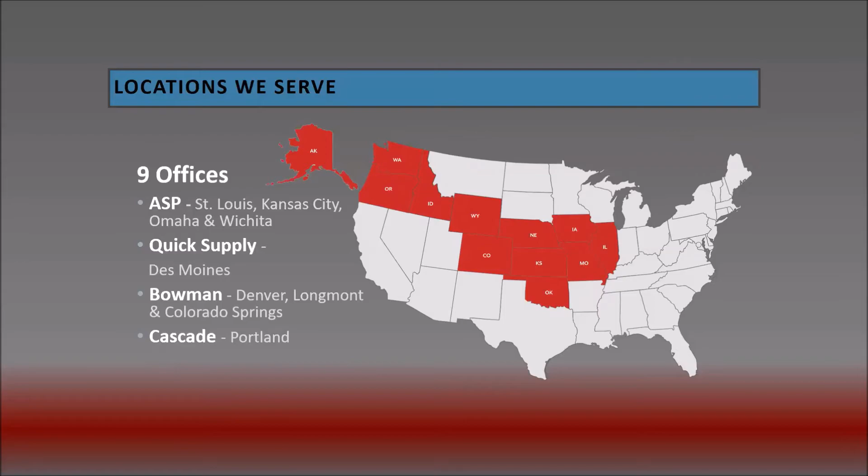We have a number of CPESCs on staff, and we cover a lot more states than even what's shown here on the map, but these are primarily our target markets. ASP covers Illinois, Missouri, Nebraska, Kansas, and Oklahoma. Quick Supply covers Iowa. Bowman Construction Supply has 3 locations in Colorado and also serves Wyoming. And then we have our new Cascade Geosynthetics office in Portland, Oregon, and they also do work in Idaho, Washington, and Alaska. We cover a whole lot of solutions with large warehouses and great trucking ability, and I'll get into that in a little bit.

These are just a few of our categories—we have many more. Erosion and sediment control, our rolled products, we're very well known for those, and our geosynthetics and geogrids. Stormwater management is where I spend most of my time. Green infrastructure and low impact development. We also have hardscapes displays at a number of our locations, and that continues to grow. All of those work hand in hand.

We also have waterproofing and bridge at Bowman Construction Supply, and an architectural division there as well. There's a whole lot of things that we can get into, but we don't have enough time to cover them in every individual webinar. Contact me or your local rep to learn more.

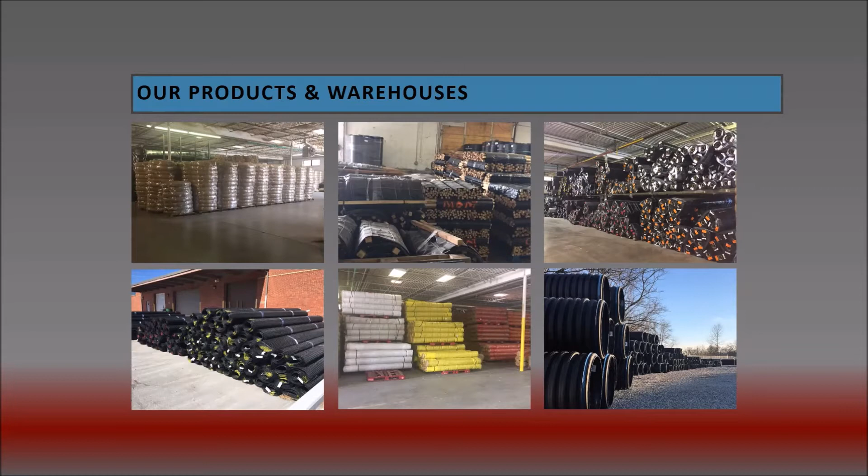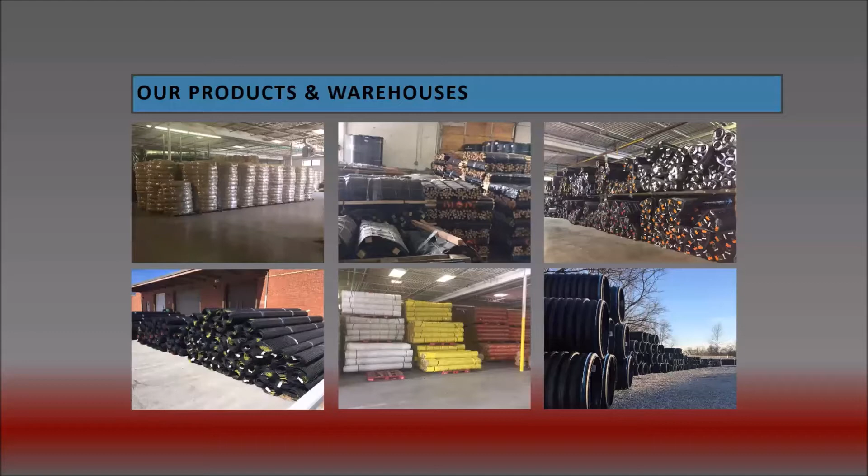One of the things I'm very proud of is how clean and organized we are on a regular basis, even in the very busy construction season. Our warehouse crews do a wonderful job taking care of the yards and the warehouse. We have a tremendous amount of inventory readily available, and we can put together some pretty creative shipments so that instead of you having to be responsible for logistics for a whole lot of different companies and different trucks, we handle that for you.

So with that, I'm going to hand over the remote controls to our friend and guest speaker here today, my friend Sam Justice. She's a PE, a fellow civil engineer. Sam's responsible for overseeing project evaluations, managing the engineering activities of Geosystems worldwide partners, and coordinating research and development. She has experience specializing in water resources, stormwater management, and rock and soil stabilization.

You can go ahead and click to the next slide if you want, Sam. She's going to cover repair and reduce slope erosion with Presto Geosystems. She has a geotechnical engineering degree from University of Michigan, and a geological engineering graduate degree from Michigan Technological University. She's a registered professional engineer. Sam provides technical and project-specific support to consultants, contractors, and distributors for all of the Geosystems products and application areas.

I've had the pleasure of traveling with Sam and doing some live presentations at some engineering offices, and we've had her as a guest speaker here with us before. She does an excellent job. Sam and I just talked this morning about how a lot of our engineering can still be done virtually. In the old days, everyone thought we had to go see every project site to walk it and talk it, and we love doing that. But we can be a lot more efficient and productive with our time if we just embrace these virtual meetings. And if that leads to an on-site visit someday, so be it. But we can do a whole lot of good engineering up front.

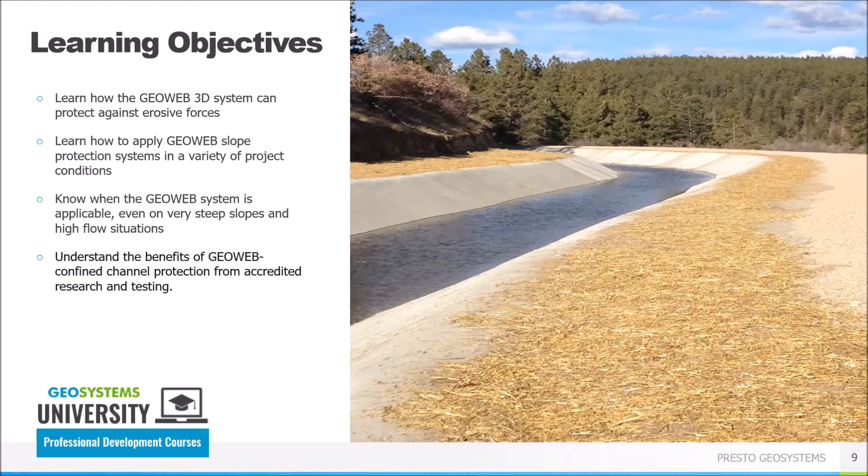And then we're also going to look at some of the university accredited research that we've performed with the Geoweb system, so that you know that we're not just pulling numbers out of thin air. We actually do back up what we are interested in and what we're trying to talk about here.

So we're going to start out with what the description is of the Geoweb 3D soil confinement system. If you're not familiar with this type of product, we've been doing it for about 40 years. So it is out there. It is not brand new, but it's still new to some people.

So the Geoweb system is our version of GeoCell technology, and it consists of two main attributes. The first is going to be the cell or the container size. The cells come in 3 diameters, small, medium, and large openings, and then cell heights from 3 to 12 inches. So what dimensions you're going to choose are going to depend on your project details and whether you have loading requirements, what your flow situation might be, that sort of thing.

We can help you determine which one is going to be the most appropriate for your project and your specific job. There are also 5 section lengths, so how big your panel is, to best fit your project site specifically.

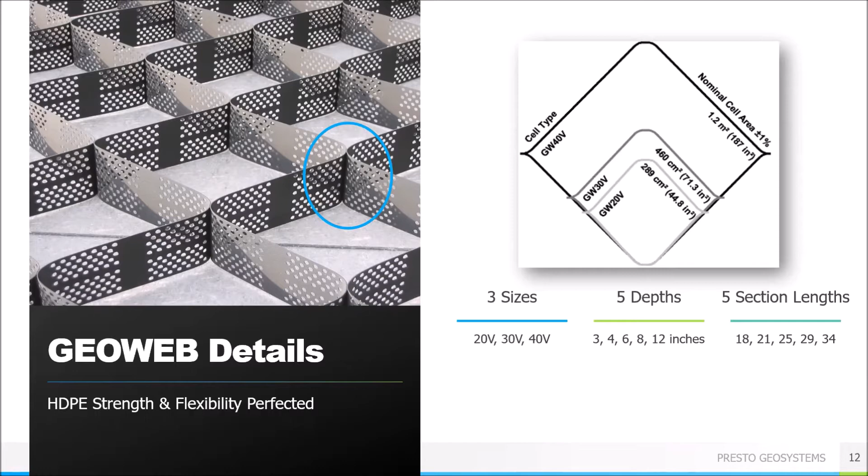Definitely want to avoid that. So our cells don't use any sort of exotic fillers or polymers, which reduce that weld strength. Some other geocells on the market do. I'm not going to name any names, but there are some lower quality products out there that I just want you to try and avoid, because I don't want your projects to fail because of something internal with the geocell. So just keep that in mind.

So the second main property of how a geocell works is going to be the infill material of the cell. There are 3 main infill types that can be used with the Geoweb system, depending on the type of protection that you're looking for. That's going to be topsoil with vegetation, aggregates and granular soils, and then concrete.

In most cases, this does allow you to use on-site salvaged or site won materials. So if you're doing excavating, you can reuse that material. So you don't necessarily need to import fill if what you have on site is going to work.

So all 3 types can be used for slope and channel protection. When they're used in channels, concrete is going to be your best option if you do have very high flows that are anticipated. Otherwise, aesthetics is kind of going to be the driving factor in which material you choose, whether you want to see grass, whether you want to see stone, that sort of thing.

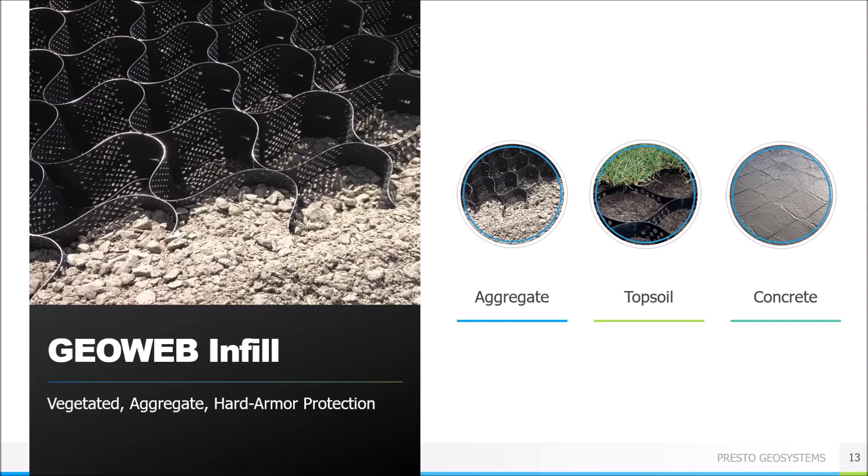We have two different options for anchoring. The first is using either stakes or face anchors, placed along the slope face and at the crest. The number of stakes needed is project dependent. The other option is to use tendons and some sort of crest anchorage system, usually a dead man pipe, perhaps concrete anchors, earth or rock anchors, whatever may be best for your site.

Then you have the Geoweb material, Geoweb panels filled with your infill material. And if you're doing vegetation, we recommend something like a biodegradable erosion control blanket until that vegetation becomes established.

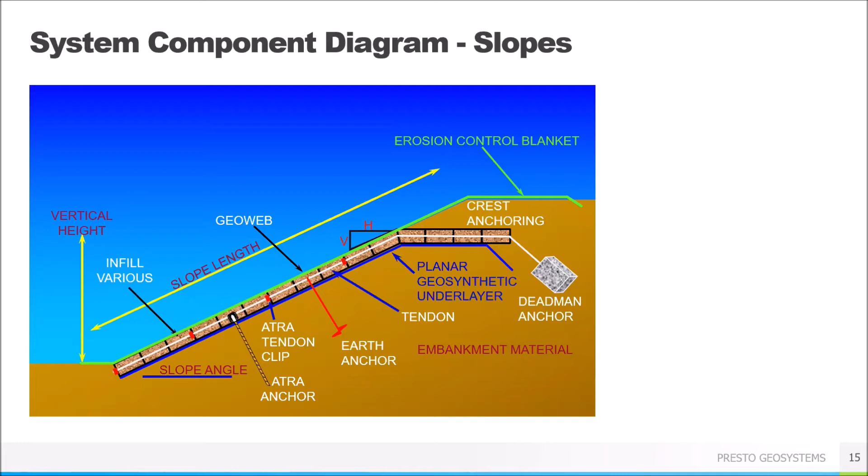It's basically the same concept where you put that geosynthetic liner, geotextile, something like that down over your native subgrade. Then the Geoweb panels, fill them with your material, and then you have some sort of anchorage—anchors along the slope face, tendons, and some sort of crest anchorage.

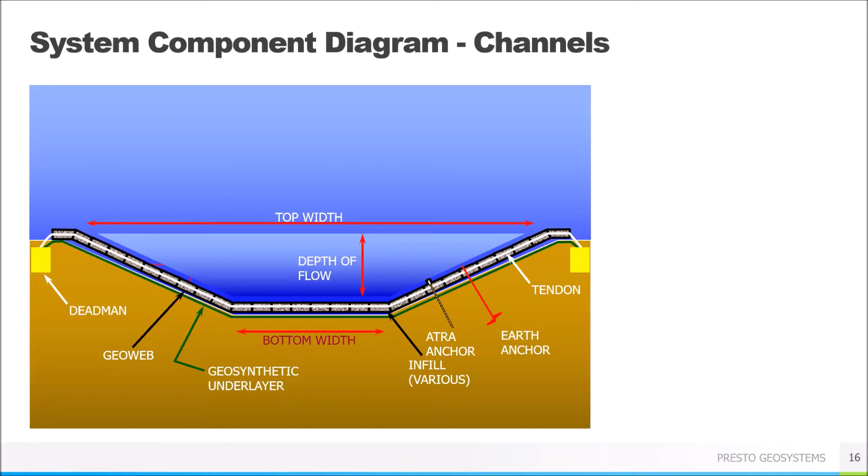So there are different options available. We are always happy to help you figure out which one is going to be most appropriate for your project. Definitely feel free to reach out to us and we can help you determine what's going to be the best option.

Most channel projects are going to be very similar to a slope project, so feel free to think of them interchangeably. I'll say slope and channel, but they basically are the same concept. There are two ways of building up the Geoweb protection system.

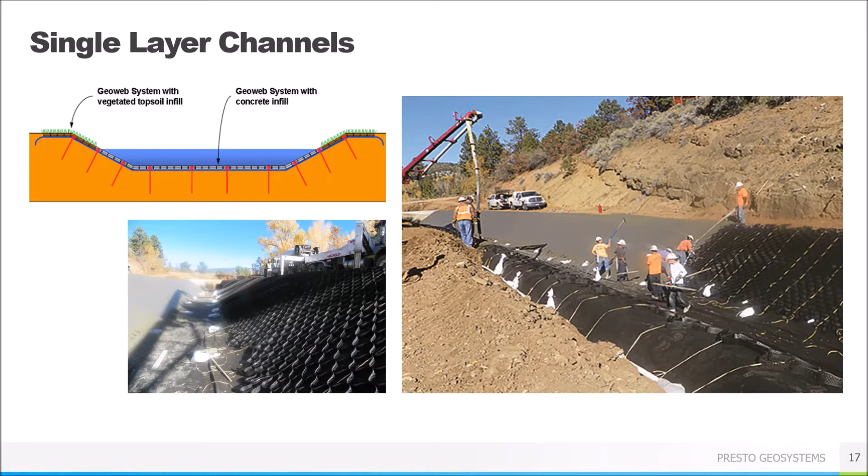The first is to use a single layer system where the Geoweb panels are laid directly on the channel bottom and side slopes and then filled in with their material, like we just saw in the diagram. This is good for areas where the slopes are less than 45 degrees—relatively shallow. So as long as there's room for the footprint of your channel or slope, this is probably the most efficient way to protect against erosion.

However, if space is limited, or if the project area is going up against existing structures like homes or roadways, a multi-layer system can be designed. In this case, the side slopes need to be pretty near vertical, and the Geoweb panels can be stacked on top of one another to create a retaining wall structure. That can happen on one or both sides of the channel.

Geoweb retaining walls can withstand the same types of velocities and shear stresses as the single layer system, and they're still flexible enough to handle curves, changes in grade, anything like that. It's a great way to create a deep channel or have really steep side slopes up to 80 degrees. There's a lot of options for mixing and matching how the panels are placed, allowing for a single design solution even with really complex project sites.

Getting into retaining walls is a whole other webinar, so we don't have too much time to talk about it today, but if you do have questions, I'm always happy to answer. We have more information on our website at prestogeo.com.

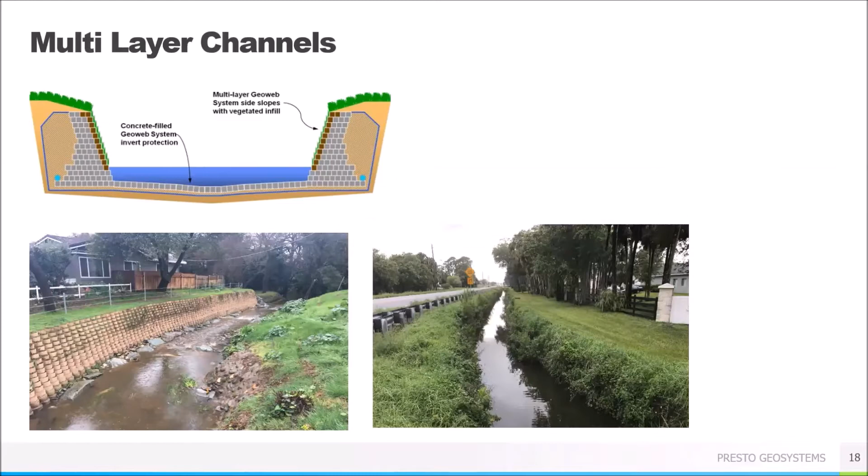Okay, so if we think back to the diagrams, there was one thing that wasn't shown, and that's the connection device between the individual Geoweb panels. So the ATRA key is what we call it, and it's the first component for a completely integrated system, connecting individual panels of Geoweb into a single web that covers your entire project area. It allows for faster installation of Geoweb and is going to last the lifetime of the project.

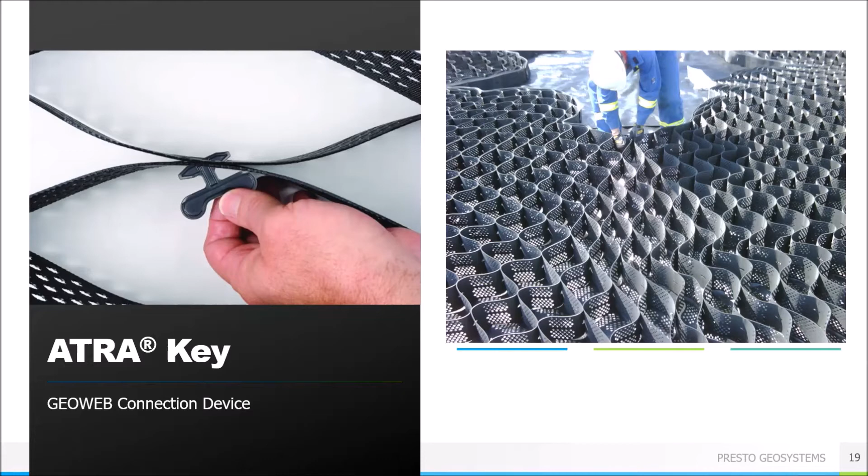Ensuring that the slope is protected and that the Geoweb system isn't going to fail under your anticipated loads. The specific engineering values of the ATRA key are going to ensure that the system holds up to loading over time without corrosion that you often see with metal staples or failure from underperforming cable tie systems.

And so now we can look at some of the anchorage options that we talked about. If the Geoweb panels are laid basically completely flat, anchorage is usually not needed because gravity is going to do all the work. However, as your slope angle increases and you start running into gravity hurting you rather than helping you, you are going to need some sort of anchorage system.

For shallow slopes, so think 2 horizontal to 1 vertical, about 26 degrees, stake anchorage is usually going to be sufficient. So we have 2 options for stakes. One is made of standard steel rebar, and then one is made of high density polyethylene, HDPE, which is shown in the photo here.

So if you're in a saline environment, like along a coastline, the HDPE stake is actually going to be a lifesaver compared to corrosion-prone steel. And the stakes can be driven either by hand with just a hammer, or with a power drill if you're looking for easier installation.

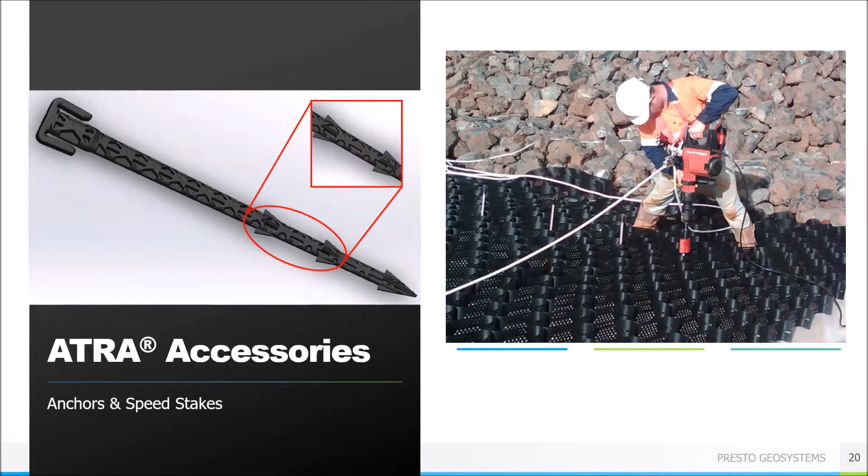Then we can get into steeper slopes, greater than that 2 to 1, but also in areas where your native soil may be highly erodible, or if you're over a surface that can't be punctured. So if you have a geomembrane liner, we can do a tendon anchorage system.

One more thing to say, the Atra tendon clip is proprietary to us. No one else has this type of load transfer device for their system. So they're using things that aren't as strong, things that aren't designed specifically to work with geocells, to try and hold the tendons in place. So it's, one, a lot harder to install, but two, it's not as great in terms of long-term performance.

So at Presto Geosystems, we've done a lot of work and research to create this whole system solution where we know the product and all of the accessories are going to be the right thing for the project that we recommend them for. So we do stand behind our work, and we really want to give you the best options that are available.

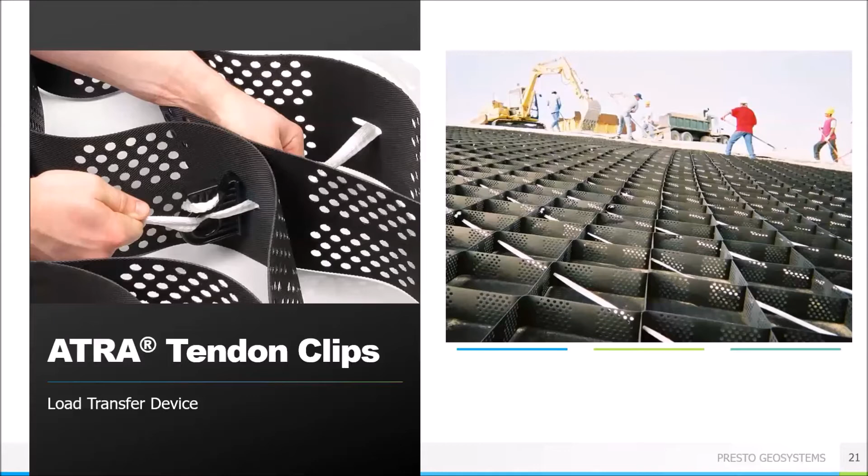Okay, so basically with that overview of the Geoweb system, let's dig a little deeper into some of the capabilities and functions of each of the infill types that we had talked about. And we can start with the vegetated infill, so using topsoil and then having a grass surface.

So one of the best things about the Geoweb system is how much trust we have in how the system works. That's because we have 40 years of experience and research backing up what we are saying. So a huge series of tests were completed through Colorado State University in Fort Collins under the direction of Dr. Chris Thornton.

CSU is considered one of the top hydraulic research facilities in the world, and it's pretty unique since it's located underneath the Horsetooth Reservoir and has a couple hundred feet of static head and can achieve extremely high velocities and shear stresses in their flumes. So this is probably the best place to test for any sort of hydraulic testing. It's amazing.

I know you didn't ask me to chime in, but I want to for two things. One, I love the Atra key, the Atra tendon, and the tendon clips. We've done a lot of projects, some with, some without, and all the ones we did without, I feel like we regretted it. We love those products, not because that's something to sell, but because they really, really work exactly as designed. But I'm also close personal friends with Dr.

Chris Thornton, and I've been out to CSU, and they do amazing work out there. I love it. So I'm excited about these.

Thanks, Sam. Vegetated infill testing was performed with two different objectives in mind. The first was the ability to withstand high velocities and shear stresses, which are the main components you think about when withstanding water flow. The second objective was to compare the performance of the topsoil-filled Geoweb system versus riprap and other conventional solutions such as erosion control blankets and turf reinforcement mats.

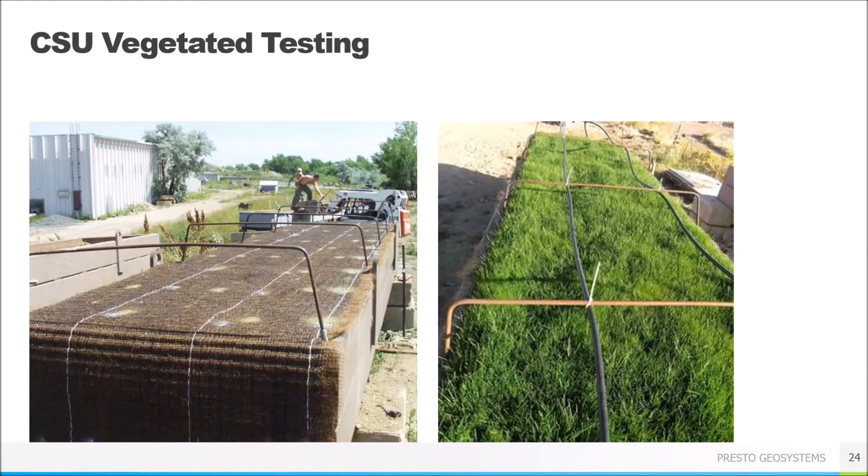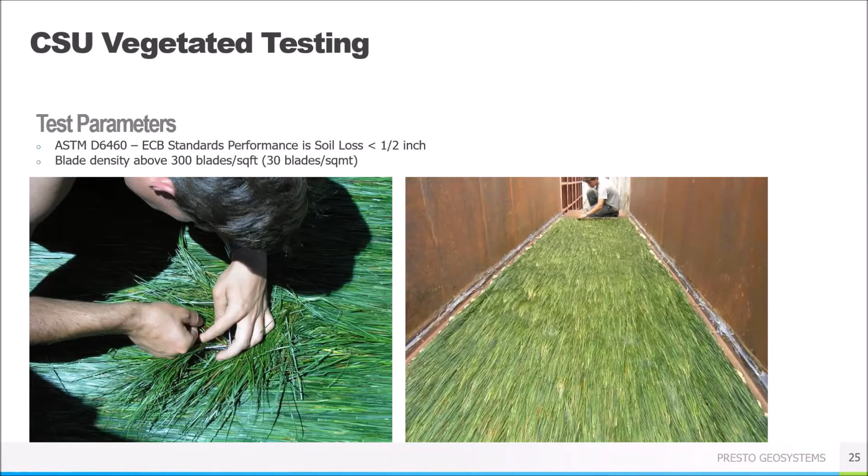A total of 10 one-hour-long tests were performed with varying conditions, including flow rate and bed slope angle, done in accordance with ASTM standards. That covers both soil loss through scour and blade density. The ASTM standard considers a successful test when you have less than half an inch of topsoil loss and at least 300 blades of grass per square foot. The blade density is important since it doesn't help if all of your soil stays in place but your grass washes away—you're just left with a muddy, ugly looking channel. So we're trying to avoid that.

Vegetated channels hold up really well, even against turbulent flow, such as around corners or near rough terrain. Most people would think a vegetated channel can't actually handle that much water, but when it's properly confined within the Geoweb system, along with a surface protection system, we can achieve velocities of 30 feet per second and shear stresses of 16 pounds per square foot.

Here's one of those tests, being performed in the outdoor flume. You can't even see the vegetation under all the water they've run through here—about 6 to 8 inches of water over top of the filled Geoweb system in that photo. So actually very turbulent for being in just a standard square flume.

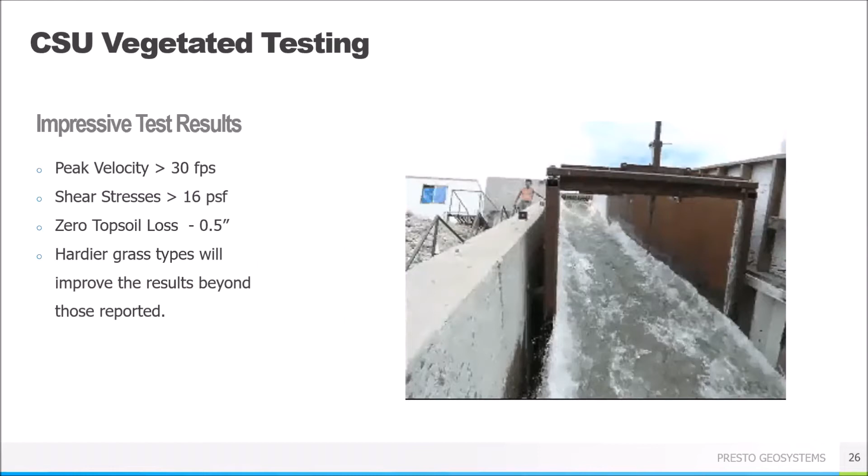Here's a quick comparison of some pretty impressive results, if I say so myself. The Geoweb filled with topsoil can handle velocities of a little over 29 feet per second compared to the 12-inch riprap, which is only about 14 feet per second. It even outperforms the use of a turf reinforcement mat by itself, basically doubling the acceptable velocity and shear stress.

So the key takeaway is that the topsoil-filled Geoweb system provides about twice the protection as 12-inch riprap and doubles the performance from a standard TRM or ECB. Really great results.

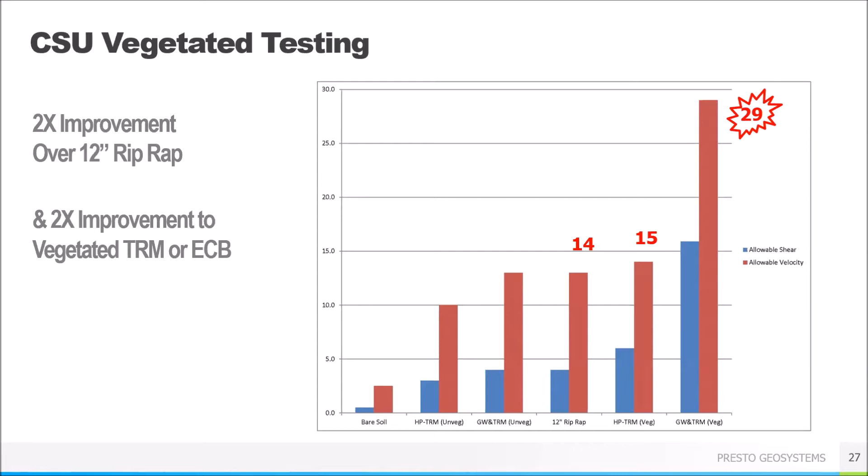Here's a typical application using the Geoweb product along the side of a highway compared to a conventional riprap system. The riprap system looks unfinished and is going to need a lot of maintenance after every storm event to ensure there hasn't been significant loss of material. With the Geoweb system, you get a nice green lawn and can be assured it's still going to look this good even after a big storm event. Much less maintenance and much less worry.

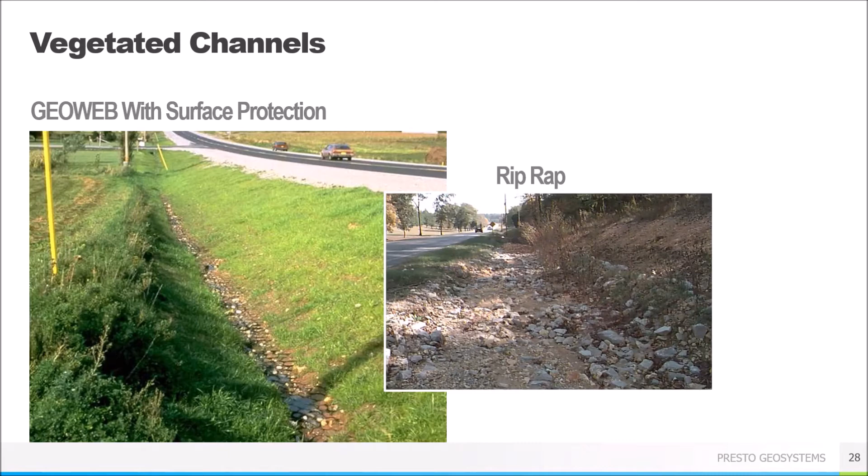An access road is actually going to be built above the slope where that excavator is currently sitting. So the slope had to be stable enough to support the expected road traffic as well as hold the soil in place. And when used as a road embankment, the Geoweb system protects the slope from water runoff and sloughing with no loss of vegetation.

Here we can see some space constraints at the toe of a slope in the form of another access road, so the slope couldn't really be regraded to a gentler, less erosive angle—it had to stay at this pretty steep one. A nice feature of the Geoweb system is shown in our after photo on the right, where there's a guardrail installed at the crest and a fence installed at the toe. There's not really a limit on this sort of infrastructure being installed near or even on the Geoweb panels, which is great in tight spaces like this one.

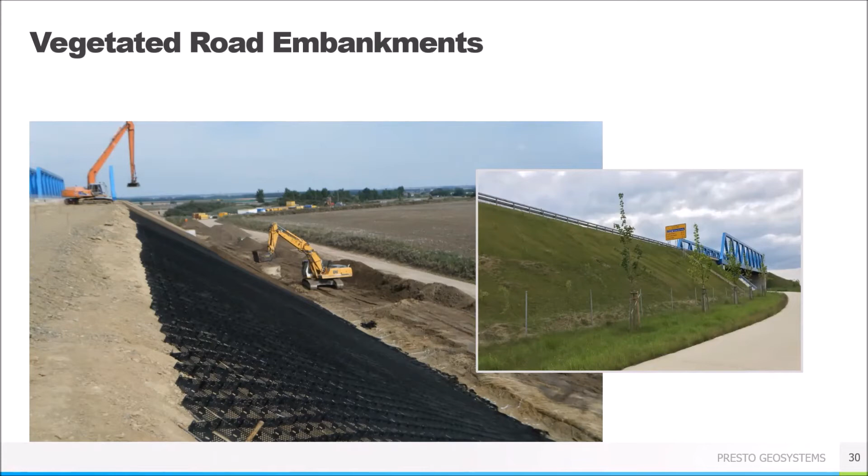So this was a slope alongside a roadway that shows a common problem that can be solved with the Geoweb system. Erosion and washout of soil slopes onto road surfaces is a problem almost everywhere. Covering the slope with the Geoweb system and then filling in with topsoil allows for a clean vegetated slope without that concern of having to constantly go back and replace the soil after rain events.

We typically recommend some sort of surface protection, such as hydroseeding, be used over the Geoweb panels until that vegetation has a chance to grow. So just give that grass a little bit of time.

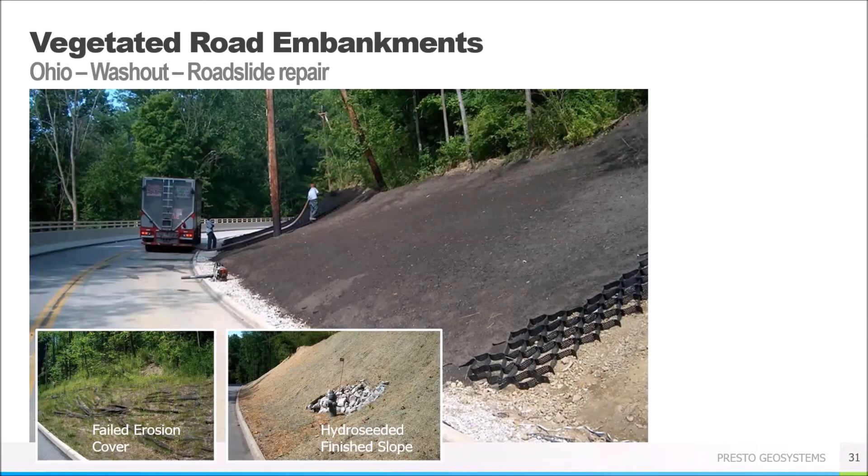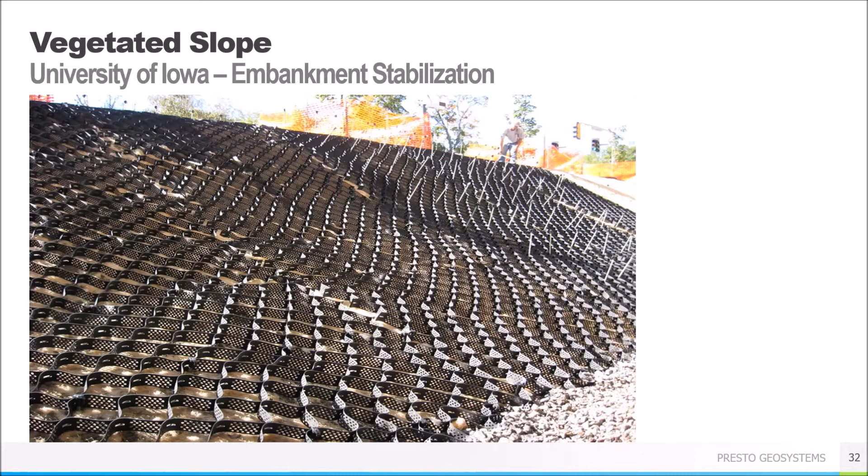Immediately behind the cameraman is a building for the University of Iowa, and it's a really common project that we see, just needing some basic surface protection on an existing slope within the constraints of a project site. The Geoweb system is fast, easy, and really effective at this job.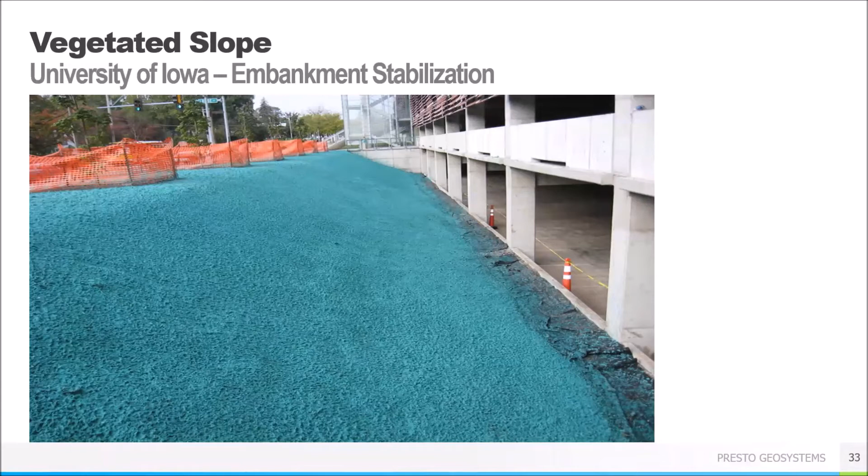Throw some Flexterra growth medium over the filled Geoweb panels, and soon you have a nice green slope that won't allow significant runoff or soil to flow into the parking garage. When the grass is fully grown in, you can't see the Geoweb panels at all. It just looks like a natural slope that people can walk on if needed, because somebody's cutting through there to get to their car a little bit faster.

So roadway embankments are not the only option for the Geoweb system. You can place the panels along a shoreline to help against erosion due to water movement or wave action. This project was on a man-made lake in Kansas.

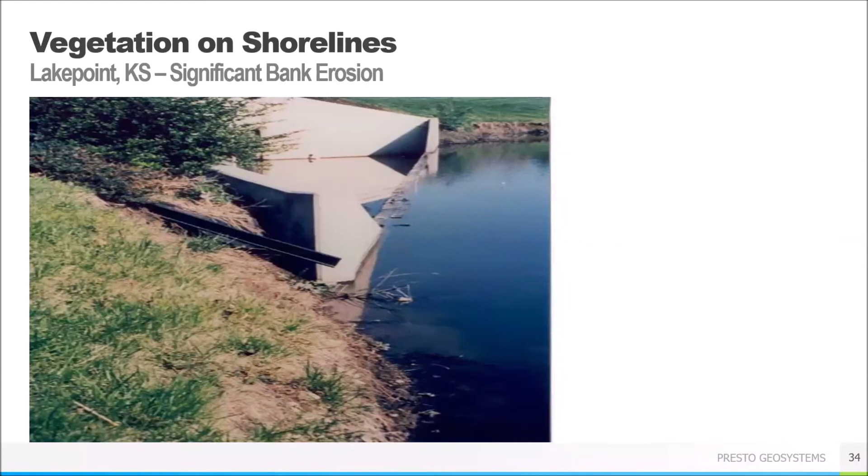Water is constantly flowing, gently, but moving nonetheless towards an outfall structure. And the shoreline was getting pretty severely eroded, eating into people's backyards and making it unsafe to walk on. So the Geoweb panels are placed both above and below the average water line in this type of project.

The panels need to go below that water line to ensure that they don't get lifted up due to wave action, and essentially to protect that entire shoreline all the way to your stable lake bed. The area does not have to be dewatered to do this type of installation, so you don't have to worry about putting in any sort of temporary cofferdam or anything.

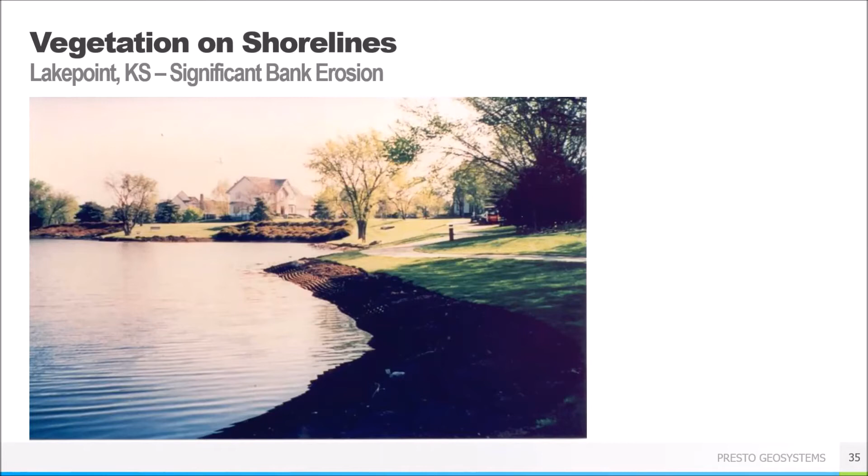The Geoweb panels will float initially, but eventually they're going to be staked down to be held in place. Once the infill material is there, the system is not going to move. In this photo, it's pretty obvious to see where the Geoweb panels are, but over time, the divide between new and old grass becomes a lot less noticeable.

Using a soil and a grass type that's local in your area, maybe even using that salvaged material from the excavation process, will help with blending in so you don't have such a stark dividing line. But now you can walk along the lakeshore without fear of it sinking in, and the shoreline is going to be protected against erosion for years to come.

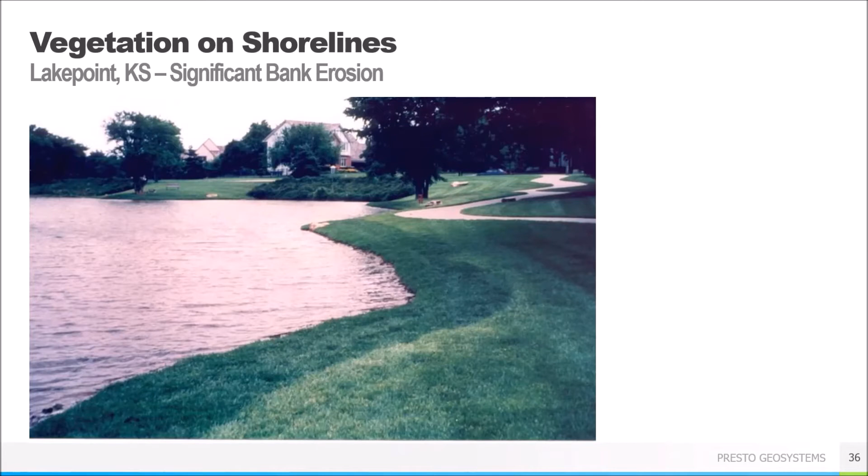One last thing for vegetated infill - I just want to highlight that the Geoweb system along channel side slopes is definitely an option. Notice how the panels just cover the sides, not the channel bottom itself. So the Geoweb panels will allow for vegetation growth up both the embankments, which normally aren't going to be underwater, so grass is going to grow just fine.

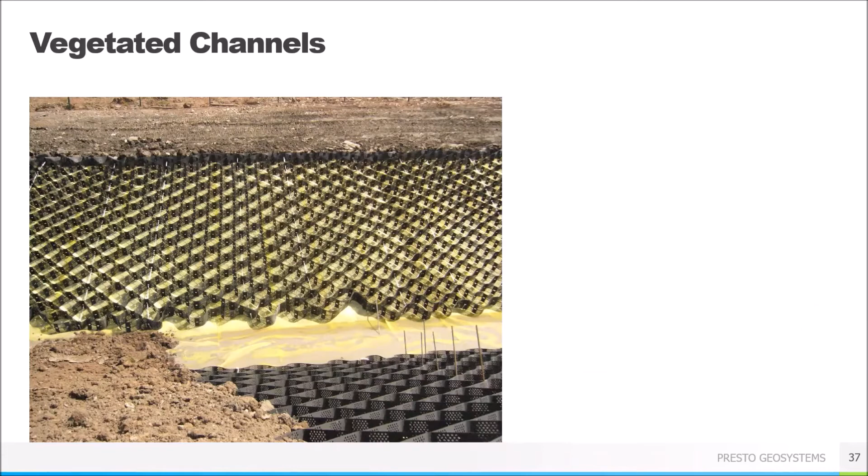Notice that there is the bright yellow liner that's there below the panels. So they decided to use the tendon anchorage system, without causing any damage to the liner. Even with that liner underneath, the vegetation can still grow because of the soil held within the cells of the Geoweb panels. So now this stormwater overflow channel, if it does become flooded, the side slopes are protected and the channel can do its job.

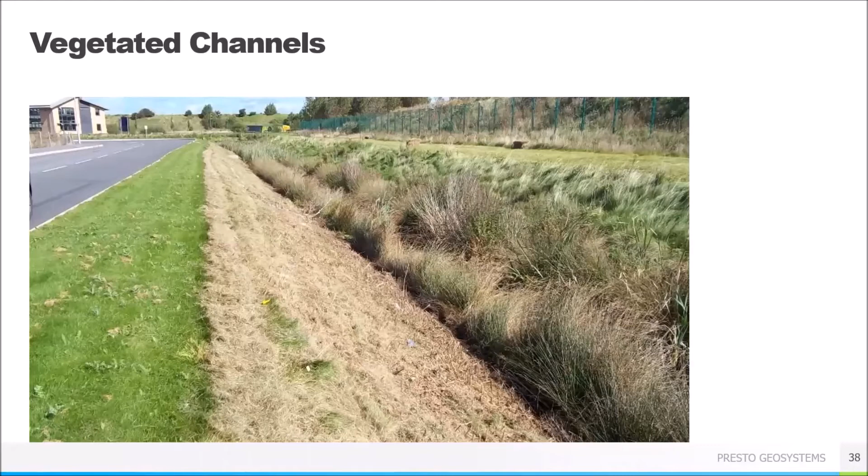Maintenance on these type of systems is actually really easy. Lawn mowing can happen if you have regular grass - just use your standard lawn mower, walk-behind and riding varieties, totally fine. You're not going to damage the Geoweb panels by doing that. Or you can pick a flowering or tall grass vegetation and no maintenance is needed to begin with. So it really is what we call a place it and forget it type of system.

Okay, so that was a lot on vegetated infill. Hope you were able to keep up. But let's move on to aggregate or stone infill next.

The crushed aggregate testing at CSU was both indoor and outdoor. The main objective was to determine how much the Geoweb 3D confinement can aid in reducing the riprap stone size. The indoor testing consisted of varying flow rates and bed slopes, along with 2 different aggregate stone sizes. We looked to see how well the aggregate stayed in place to determine what rock size would prevent washout. We ended up maxing out the indoor flume and had to go to the outdoor flume to allow for increased flow rates.

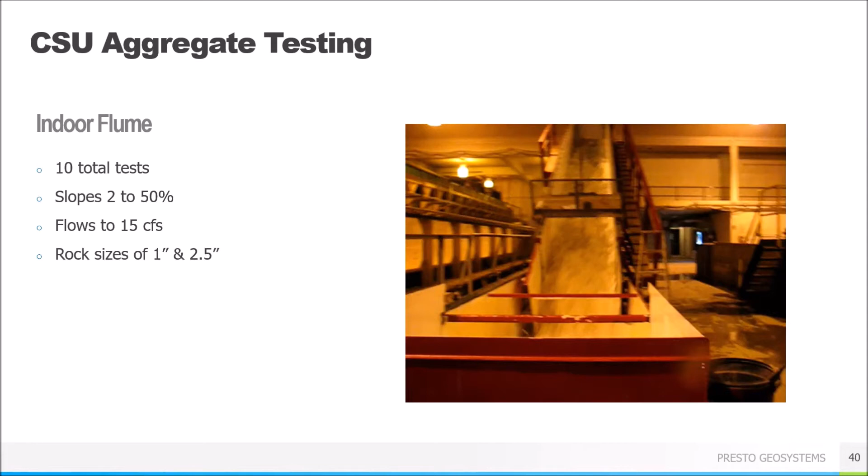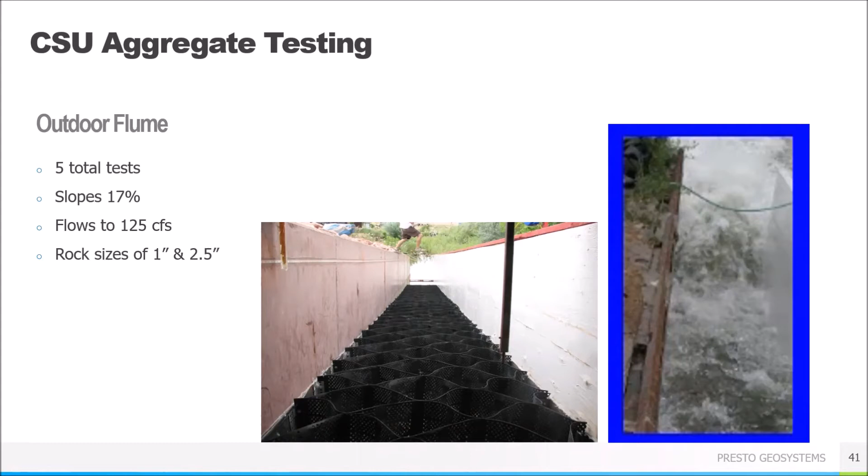We got flow rates up to 125 cubic feet per second, along with 2 different aggregate sizes. You can see it's pretty turbulent flow going through here, and again we're looking to see how that aggregate stays in place. Obviously, the system doesn't work if the water can just pick up the stones and move them somewhere else. You want them to be held by the Geoweb panels.

The results are pretty impressive, working on a steep slope and allowing some pretty high velocities and shear stresses. Although if we remember back to the vegetated system, the allowable velocities there were 30 feet per second, and now we're down to 18, so it's actually a little bit less. A vegetated system can withstand those higher flows and stresses, which may seem counterintuitive until you think about the strength of a properly rooted grass system compared to a single stone within the aggregate. So it makes a little more sense.

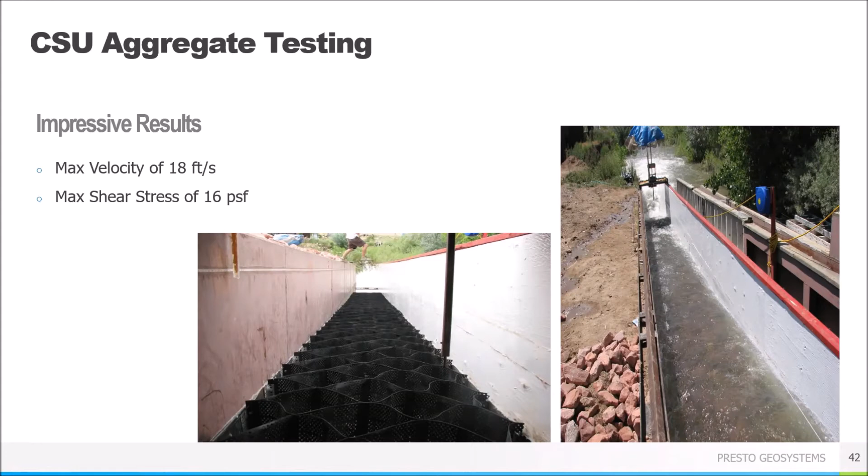Remember, the main objective was to determine the reduction in riprap stone size due to the Geoweb system. Also keep in mind, vegetated channels can only withstand water flow on an intermittent basis, otherwise the grass is just going to die because it's drowned. If you have continuous flow, aggregate infill might be the better option, even though it can handle a slightly lower velocity. So different things to think about.

So Dr. Thornton put together a design tool that we use. It's based on an entirely too complicated regression analysis, but it helps us compare the reduction in crushed aggregate with the Geoweb system compared to conventional riprap. The tool is based on all of the testing data, and it allows us to predict the rock loss and rock size based on specific hydraulic conditions. So what it comes down to is that we can recommend the appropriate cell depth and rock size for individual projects so that you can be confident that the aggregate placed isn't going to wash away.

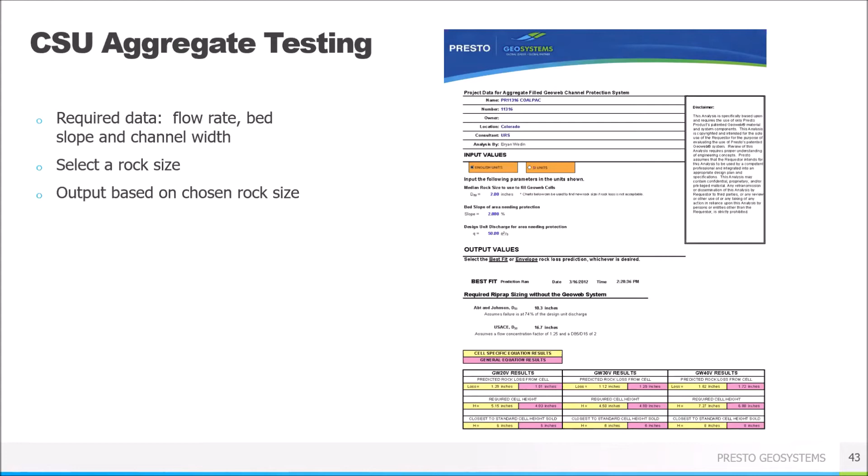So you can see there's some results showing using a 2-inch crushed aggregate confined within a 6-inch deep Geoweb panel. The tool compares the Geoweb solution to both the US Army Corps of Engineers and the Abt and Johnson design formulas, which you can see are at 16 inches and 10 inches respectively. So for this job, the reduction was pretty huge, 2 inches compared to 16. It's pretty great.

So this was a project for the Missouri DOT, which used the Geoweb system to help stabilize the surface around a bridge abutment, and also along railroad tracks and crossings. The flexible nature of the Geoweb panels means it's easy to contour to the slope face and around obstacles such as piles or abutments. So with this system in place, water erosion is prevented around the abutments, reducing lifetime maintenance costs.

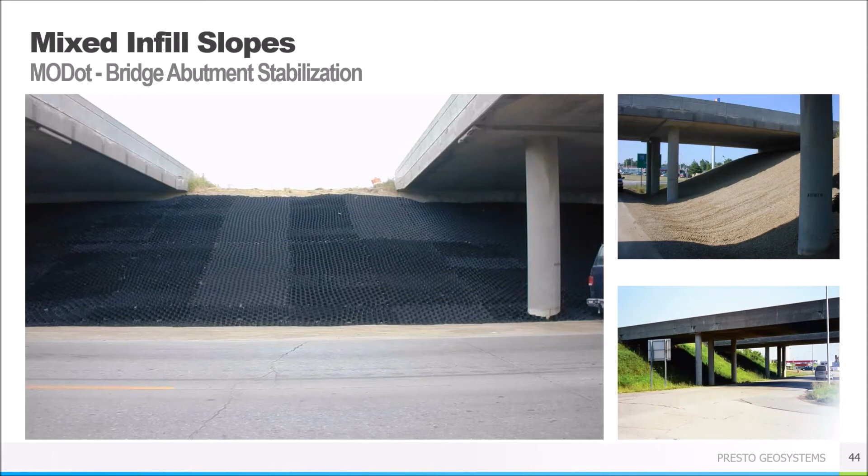And the entire project was actually a mixture of topsoil and vegetation in some areas and aggregate in others. Aggregate usually being used below the bridges where vegetation would have been difficult to establish, since that's always kind of in shade, not really getting a lot of sun. So you have a nice ability to mix infill types to best fit your project needs.

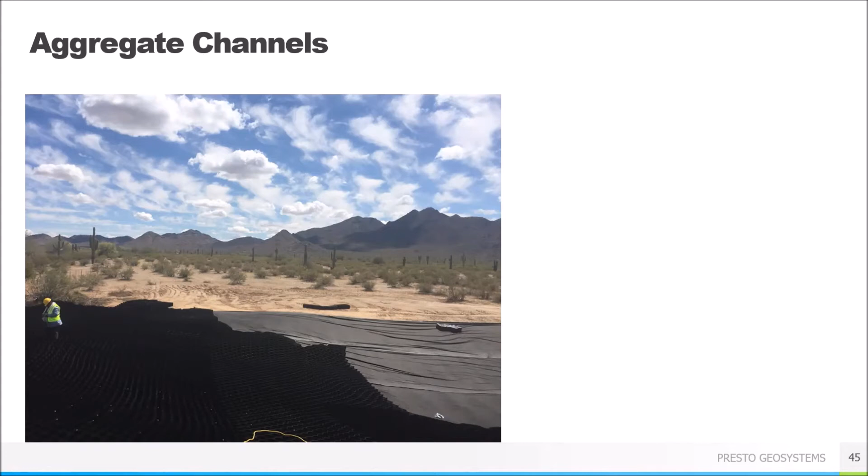This was another project just outside of a brand new housing development in Arizona. Heavy runoff from intense storms was leading to erosion and flooding in the adjacent subdivisions, and several existing embankments and storm channels had already failed under 100-year storm events. Repair time was critical to reduce flooding to the homes and prevent that runoff. It was about a mile-long channel, routed with detention ponds and into the natural drainage areas.

So the channel area was cleared of any existing vegetation or boulders, anything that might have gotten in the way. And then it just had the native sand subgrade, graded and compacted. So to prevent infill loss, a non-woven geotextile was put underneath the Geoweb panels.

It's pretty common to just use a really lightweight, think like a 4 or 6 ounce non-woven geotextile. The channel here is pretty wide and had some pretty shallow side slopes, I think 3 to 1 in this area. And the flow rate was going to be both intermittent and slow.

So the anchorage consisted of using our ATRA stake anchors, using those stake anchors along the face rather than using tendons.

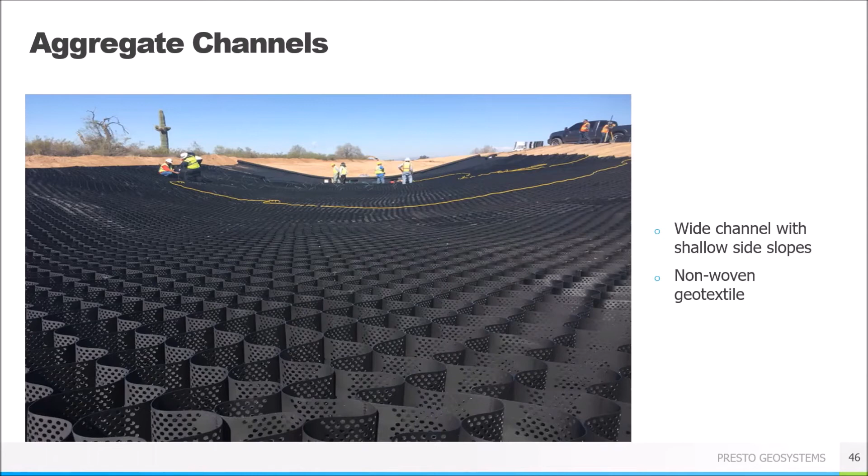One of the really nice things about using the Geoweb system is that it allows for in-place adjustments depending on what you need. Here you can see the Geoweb cell depth was actually reduced from 8 inches all the way down to 4. That's because the second half of the channel from the main inlet was subjected to reduced flow rates and shear stresses. Because of this, less protection is required, so a shallower Geoweb panel was used, saving on cost and installation time while still meeting the performance requirements.

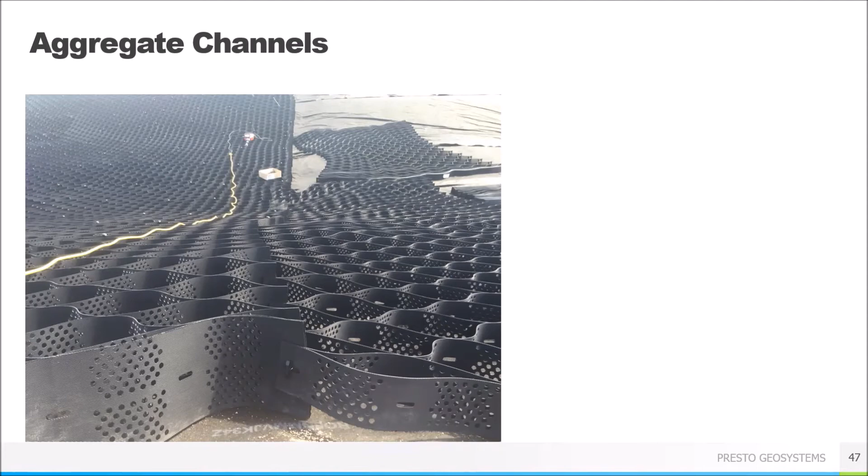This is really only possible due to the strength of our ATRA key, the connection device between panels. If you had used staples or something like a zip tie, it just doesn't provide enough strength and those panels are going to end up separating over time, so you have an area of potential failure in the middle of your channel.

I can vouch for that. Sorry to chime in again, but that's exactly what I've seen in the past, other things used were always regretted. Thanks.

Also want to point out installation rates - it's actually pretty quick. Once this crew, who had never done Geoweb installations before, kind of got their hands on it, they were able to get about 2,000 square feet of Geoweb sections per hour in the ground with a 4-man crew. So it does not take a whole lot of effort to do this type of installation.

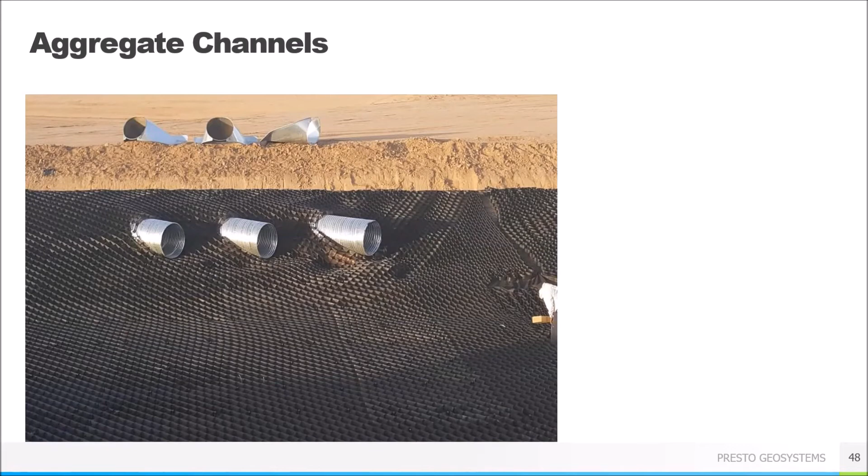The infill for this project was actually waste rock from a nearby quarry, so it's not the greatest quality, but that's really okay. When you're using the Geoweb system, the rock doesn't have to have any requirements other than a general size and that you want it to be angular.

So try and avoid things like pea gravel - your money can be saved on material and hauling costs. The only infill we really want to avoid, like I said, is that pea gravel, maybe something like river rock, anything that's really rounded because it's not going to lock up and it's going to have that potential to have a little more scour. So just something to keep in mind.

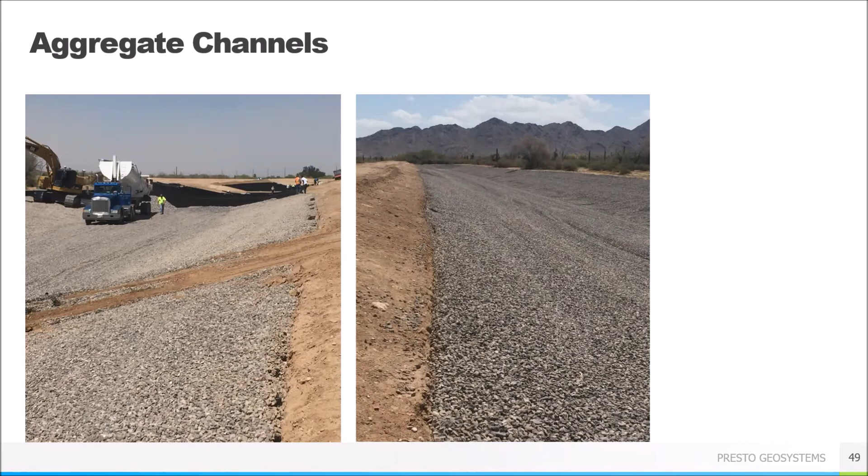Another advantage of using the Geoweb system is that you can actually drive directly on these systems once the stone is in place. So they can be used as access roads for construction to try and help limit the amount of extra installation space and time that you may need. You can sort of fill in ahead of the trucks in front of you, and the Geoweb system can support those heavy vehicle loads, basically no issue.

So here's the installation. Once it's done, you can see the channel flow going over the Geoweb panels and out into a natural drainage system. With the aggregate protection system, there's going to be little to no maintenance required since that aggregate's going to be confined within the panels.

You don't need to replace it. You don't need to come out and keep checking to make sure it hasn't washed away. The channel itself is built large enough to accommodate large storms without overtopping. So again, a place-it-and-forget-it type of system, which is really beneficial.

Okay, so our last main infill type, which is concrete for impervious hard armor protection. Testing was performed at CSU for the concrete filled channels. We ran a couple tests.

Basically, there is no requirement for the concrete once it's poured into the Geoweb panels. You don't have to have any sort of internal reinforcement such as rebar or fiber. The Geoweb panels themselves are the reinforcement.

The Geoweb system actually maxed out the flume at CSU at about 36 feet per second, and there was no degradation to the Geoweb panels, the concrete infill, or even the soil underneath the panels. It's really going to be an excellent system for protecting your channels, dam faces, anywhere that's going to see really high velocities. And 36 feet per second is just as fast as the channel flume could handle.

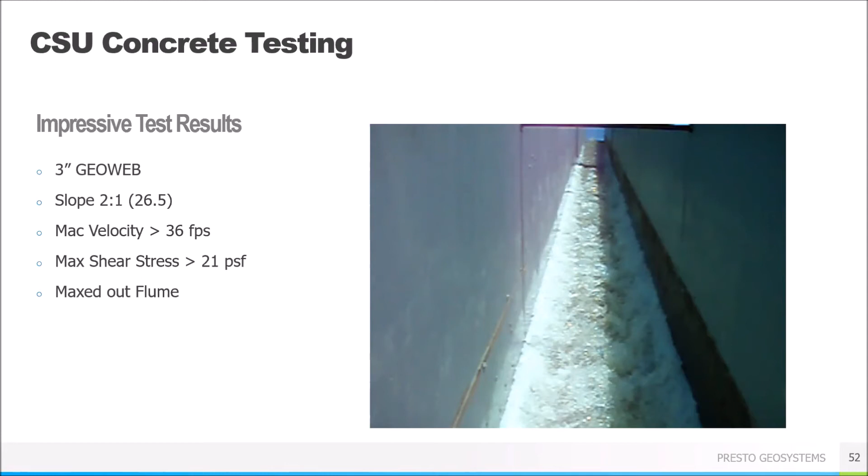It's obviously capable of going much, much higher, so don't let the 36 feet per second stop you. I do want to say the Geoweb system is the only geosynthetic, including things like articulating concrete blocks, TRMs, ECBs, ever to max out the test flume at CSU. So we are very confident this is going to work for even the most challenging projects.

Now we don't typically see concrete slopes in areas where there's not a threat of high velocity water movement, but it does happen. This was a project protecting a bridge abutment from erosion. The slope was really quite steep, actually greater than 45 degrees. I think it was around 55 degrees for this specific project.

So there aren't actually many options available for this type of protection, but it's no problem for Geoweb. You can see that the bridge was built up and then the underpass slope was graded, and then the Geoweb panels were allowed to be installed.

So obviously there's no room for a crest anchor trench here, which is something we saw in all the other locations and in the diagrams way back in the beginning. Usually there is some sort of trench or horizontal turnout at the crest to help anchor the Geoweb panels. Couldn't happen here because there's a bridge abutment in the way.

So you do have some other options, such as using concrete anchors, or if there had been a little more space, they might have been able to do earth anchors, which don't need that large anchor trench. So there are options if you know you're in very confined space project environments.

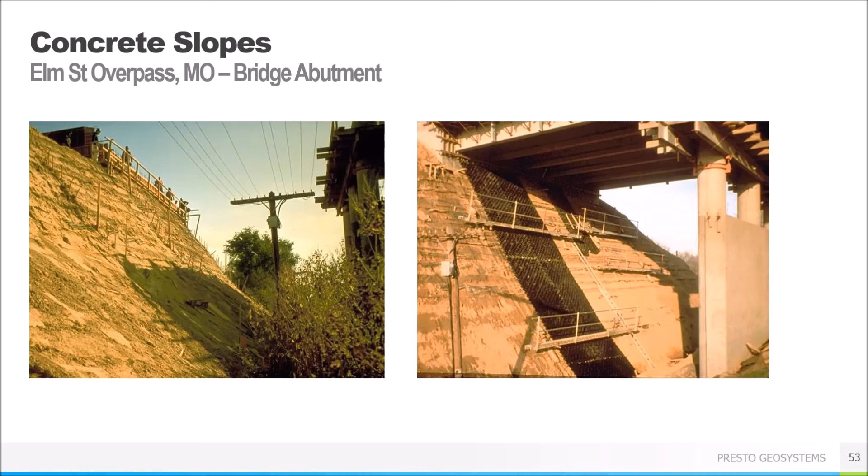Because of the steepness of the slope, the concrete had to be pumped into the location, and then the Geoweb panels were filled in by hand. The Geoweb panels should be filled up to the top of your cell and then screed flush so that you ensure a consistent concrete depth.

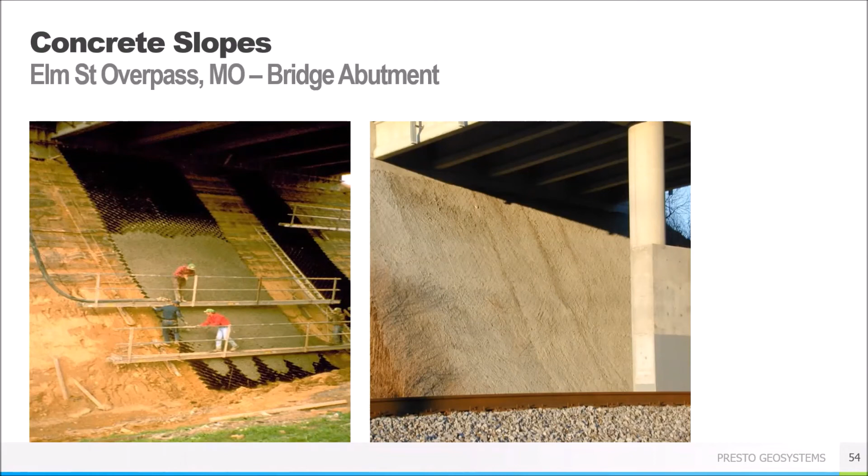So this was definitely an interesting application to have a concrete slope like this. But if it's required for whatever regulatory reasons, or if it's just the best fit for your project needs, using the Geoweb system as your formwork is a great way to place concrete in otherwise impossible locations.

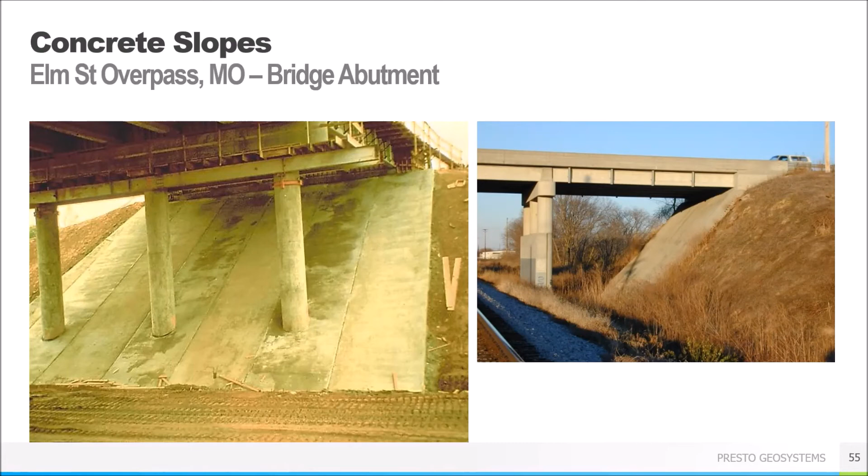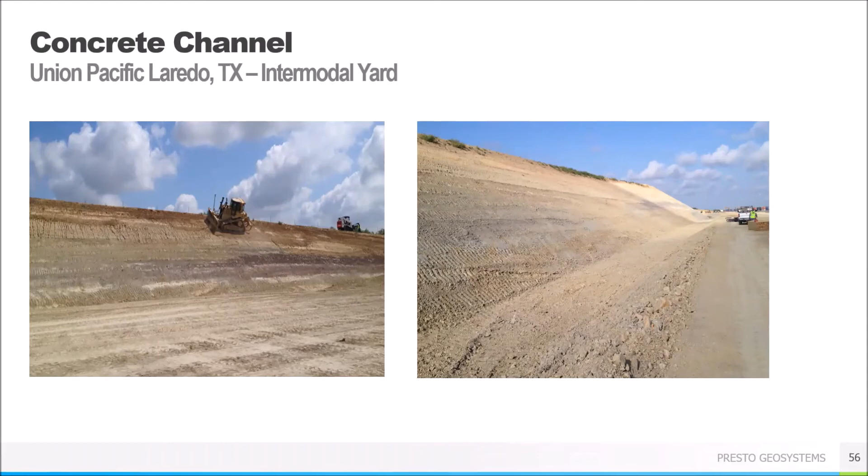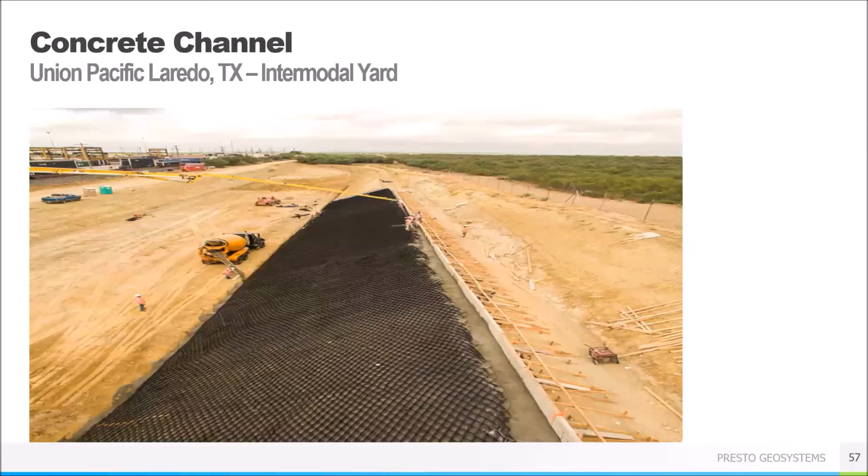The side slopes of this channel used 3-inch deep Geoweb anchored with stakes because the slopes were relatively short and flat. The bottom of the channel used 4-inch Geoweb. Again, you have that flexible option to have different depths, and that was done so that the bottom of the channel could support some vehicle loads. Best way to create the right project for your needs.

So as I said, the Geoweb panels act as the formwork for the concrete, so you don't need to build any additional forms.

That's really nice because it can be tricky to build forms on slopes, and it always extends your project times when you have to have that additional formwork created. So using the Geoweb panels is a nice shortcut.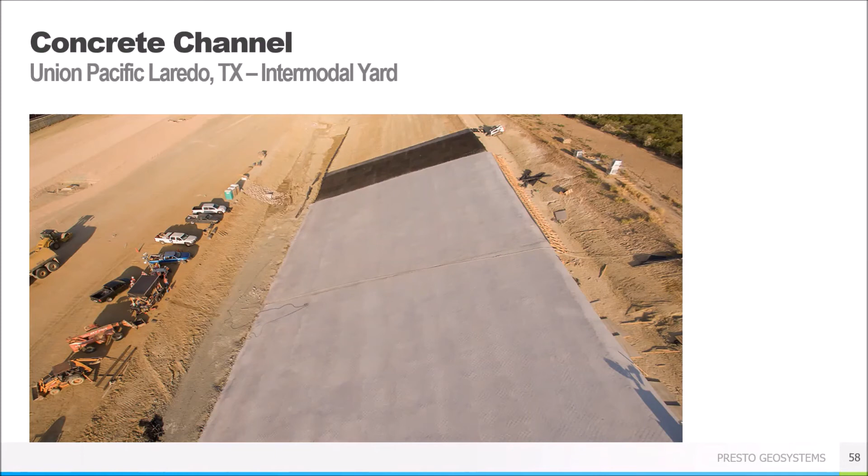Generally the concrete is poured from the top to the bottom, and the cells hold it in place, preventing it from slumping. You do get a nice, even, consistent thickness when using the GeoWeb panels.

You do need to worry about pore water pressure buildup with any sort of concrete structure, and that includes GeoWeb panels. You don't want water to build up underneath, which could cause uplift and damage your concrete.

It's pretty easy with the GeoWeb system to drill in weep holes, or have them pre-installed before the concrete is poured, to relieve that pore water pressure buildup. It's really important that you do that so you get a nice looking project like this.

This one was more than 1 million square feet of GeoWeb, and it saved the railroad a significant amount of money and installation time. So we can go from really small road embankment protection to some of these massive projects—the GeoWeb system is going to be able to handle all of it.

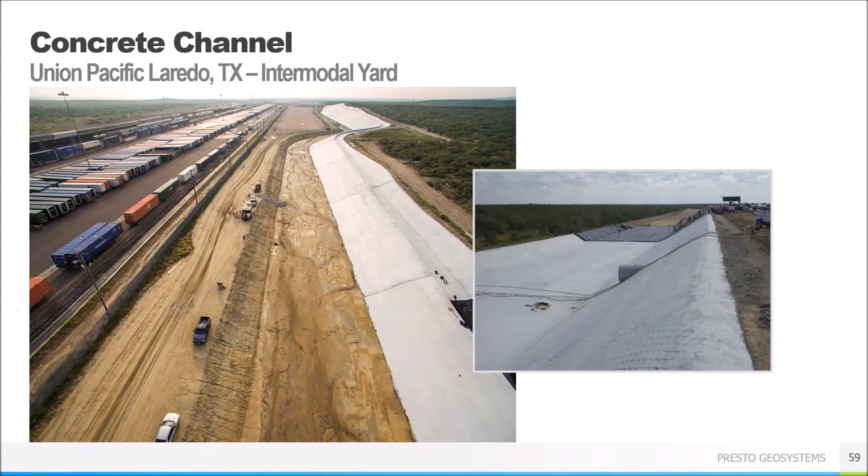This last section I'm going to go through really quickly. It's just something I want to highlight because I think it's really interesting—these are some unique conditions, including very, very steep slopes and high flow velocity situations.

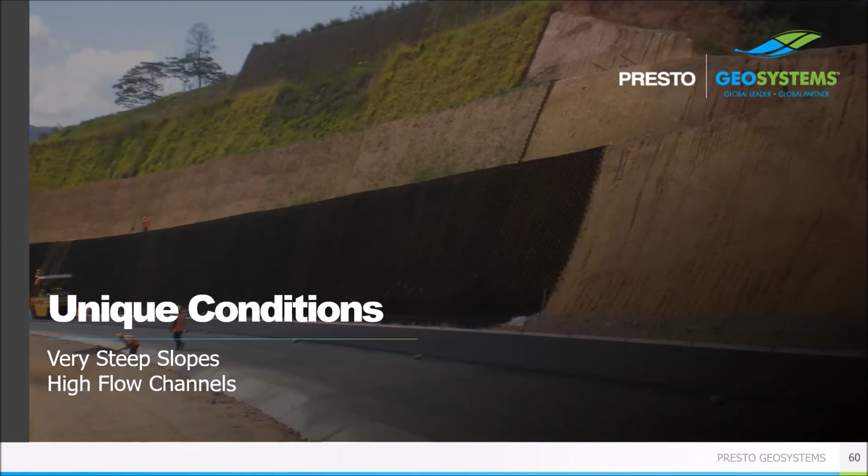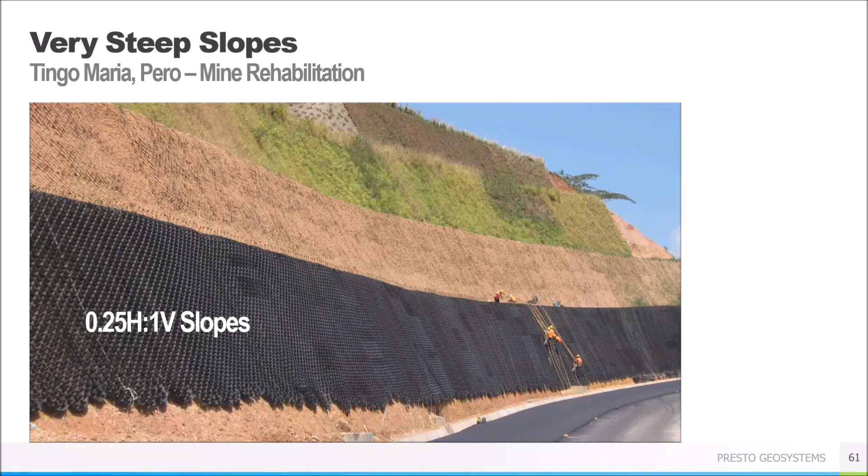This was a project along the Pan American Highway in Peru, where the slope of each one of these terraces was actually 1/4 to 1, so a little greater than 75 degrees, which is insane.

These terraces were actually hand compacted at this angle. They were man-made, created to be like this, and it required a lot of tendons and a lot of anchorage to help hold the GeoWeb system in place.

But it's definitely doable, and you get some interesting pictures like this of guys rappelling down these very steep slope angles to install the GeoWeb panels.

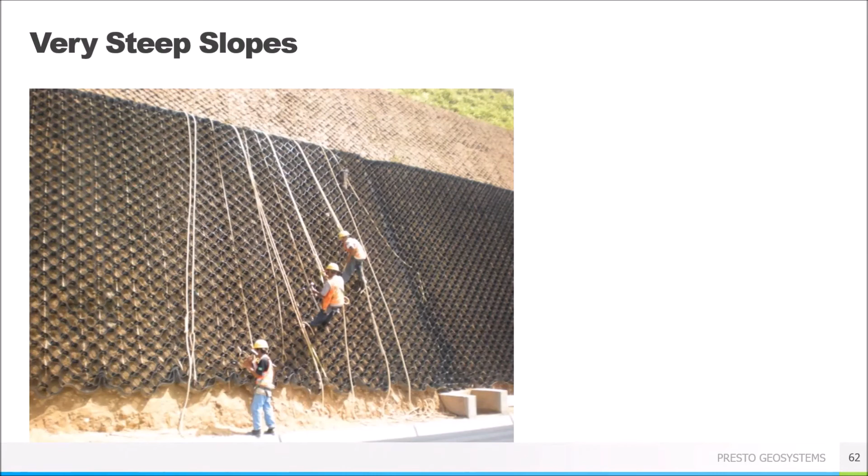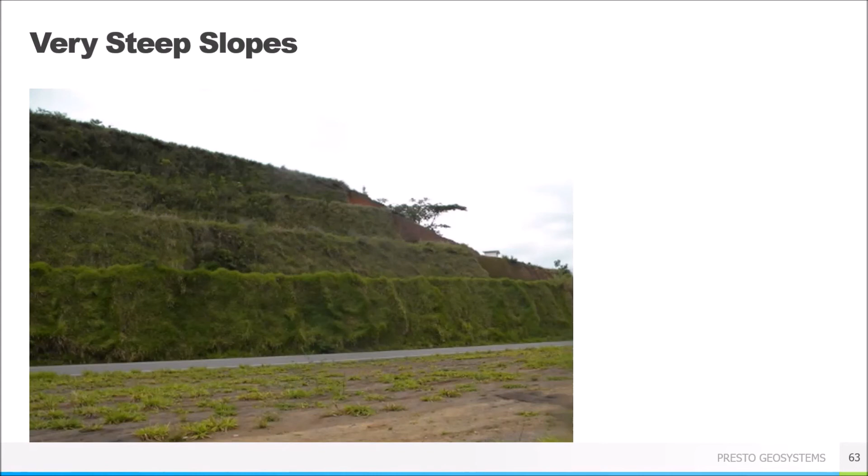So using the GeoWeb system gives that vegetation a little bit of extra boost to help hold it in place, apparently even on incredibly steep slope angles.

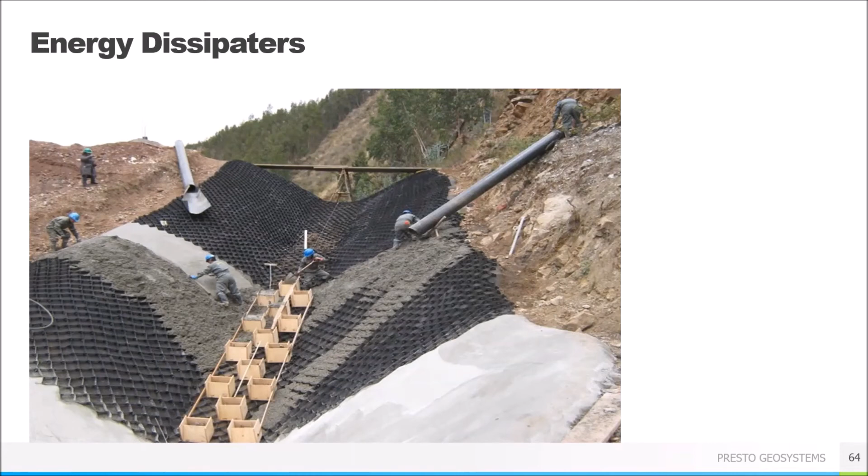The other thing I want to point out is for very high flow velocity situations, you can add things like energy dissipators to a channel. Generally these are only going to be installed in concrete channels because you do have that very high flow. But they can be as low tech as just throwing some boulders in the middle of the channel, or you can go to nicely formed patterned dissipators like they're doing in this photo.

They can be placed on very steep slopes, same as the GeoWeb panels. If you utilize a tiered system like this, it can help limit the height and the angle of those channels, making it a little more doable while still containing and directing your water to your downslope collection area.

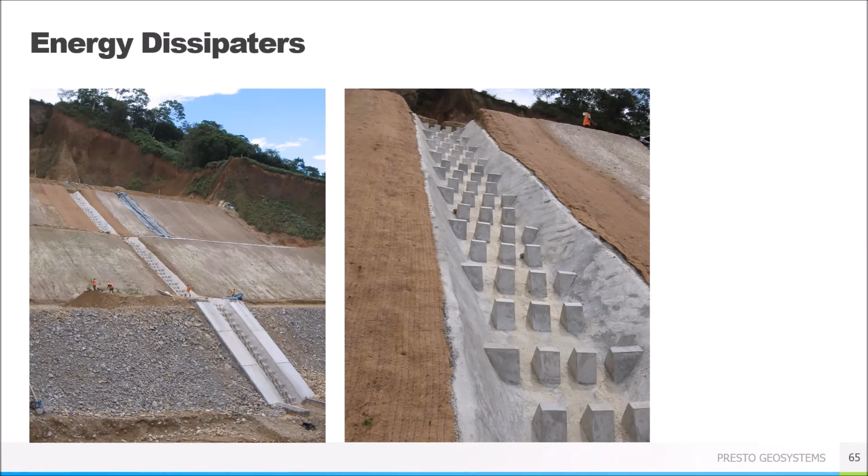In this particular case, the dissipators were actually formed off-site and then installed after the concrete of the channel itself had cured, by doweling into the concrete and providing an epoxy bonding agent around the bottom edges of each of the dissipators. So a couple different ways of doing that if you are interested.

The number of dissipators, their size, spacing—all of that is going to be dependent on what type of flows you're anticipating in your channel conditions. There's no one right way to include energy dissipators, but it's something myself and the rest of the engineering team here at Presto Geosystems have experience with, and we can help you determine what is most appropriate for your site if you need something like this.

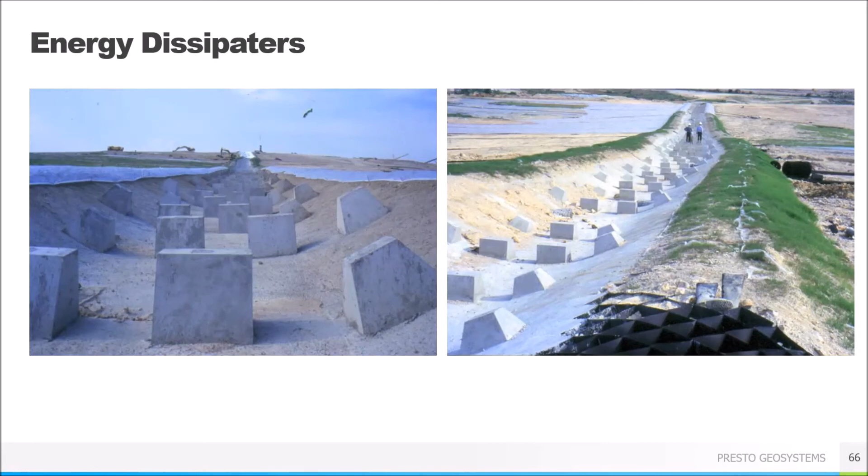So just keep in mind, if you do need to go from very high flow velocities into essentially no flow at the bottom of your channel, this is one way to do it, and the GeoWeb system can accommodate it, no problem.

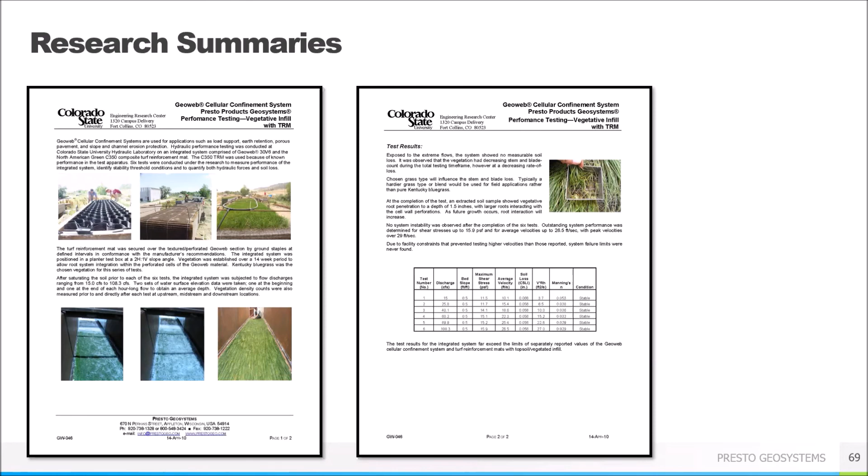We have all of our systems backed by 40 years of experience and research and testing, and we stand by all of these numbers. So here we offer just some quick summaries of the research if you are interested and want to know a little bit more about how that testing was completed at CSU. This is something that we can offer, and it can also be included in bid packages to be a little extra boost for why the Geoweb system might be most appropriate for your project.

We do offer free project design evaluations. This is something we offer through our internal engineering team, including myself. This is how we can help you determine what size and depth of Geoweb panel might be most appropriate, your anchorage requirements, anything like that. It's all a free service that we offer.

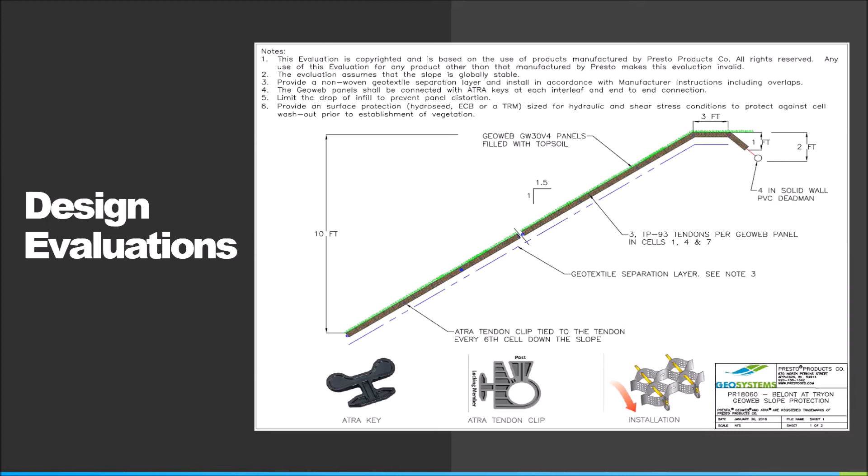It's through our website. You can fill out the form, attach things like geotechnical reports, plan drawings if you have them, CAD files, anything like that. Then we can help you get a design evaluation where we can give you some cross sections, CAD details. We would include the research summaries if you had a channel project, all of that sort of thing to help you in your bid process for any sort of individual project you may have.